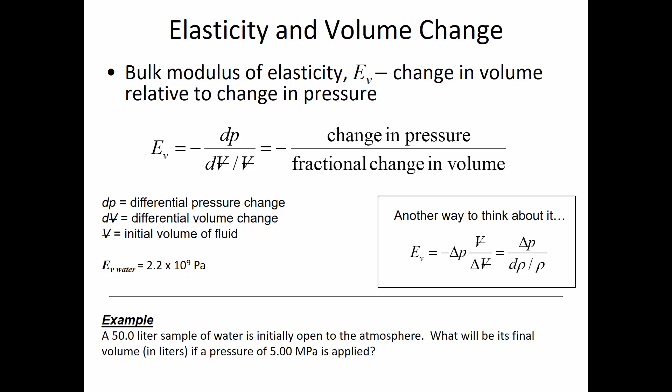I wish we were watching TV. Yeah, kind of. All right, are there other questions? Boy, that's going to be hard, we're really going to have to focus. All right, well, let's do watch TV. It's not going to be as loud as that, though.

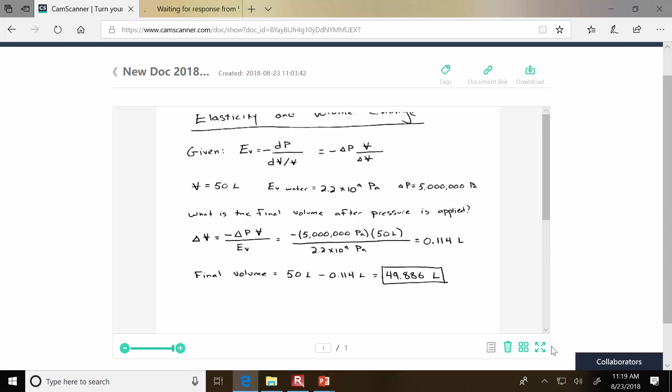So let's watch this video clip. Oh, hold on, this is going to get me kicked off. I gotta do this.

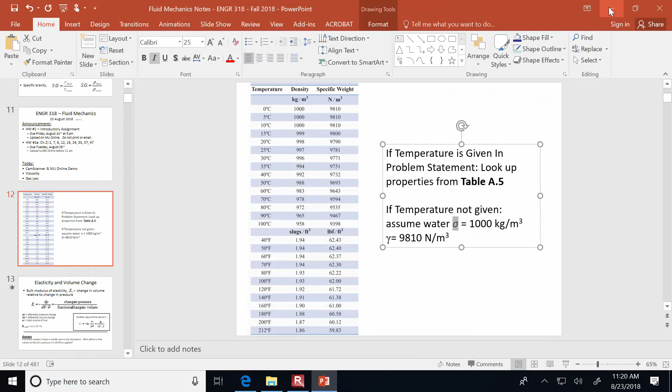The glycerin was deforming very slowly when the container was tipped over.

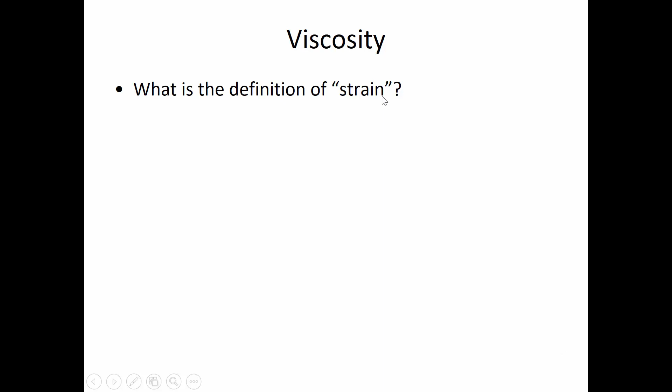So the definition of strain - you've all taken mechanics before, solid mechanics - the definition of strain is the deformation of a physical body under the action of applied forces. So, for instance, if I had a metal ruler - normally I bring a metal ruler to this class, I forgot - if I was pushing a metal ruler on the ends, it would start to bow and deform. And the harder I push, the more it's going to deform.

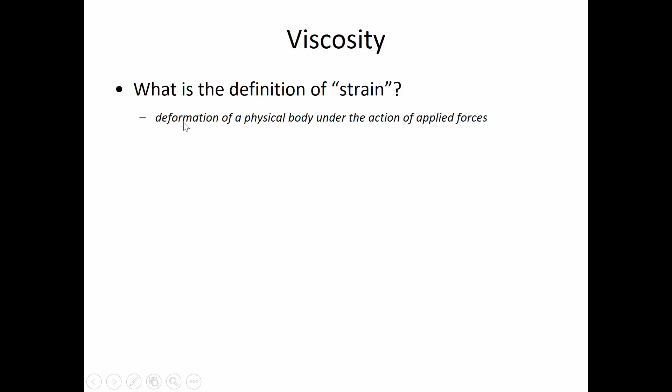So that's an illustration of strain, that deformation under the forces that are applied. So the stress is the force I apply, the strain is the response. In a solid, the proportionality of the stress and the strain we call shear modulus. Hopefully that rings a bell. And one of the ways we differentiate between solids and liquids is that in the case of a solid, it stops deforming when it reaches an equilibrium between the stress and the strain.

But in a liquid, it's going to continue to deform as long as the stress is applied. Like if I had a tank of water and a propeller that's turning inside of that water, I'm going to be applying a stress, and it's going to keep deforming. It's not going to just deform one time and then stop. As long as I apply a force, it's going to continue to deform.

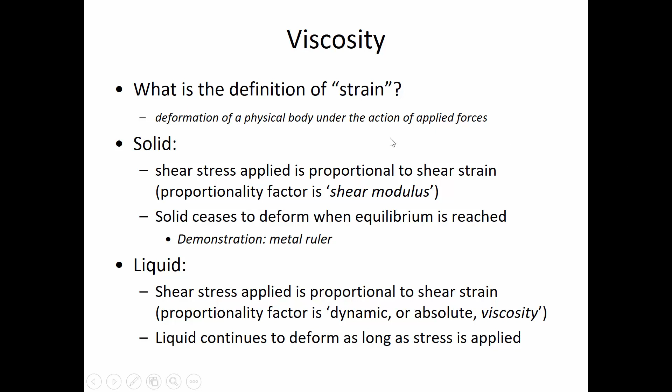Now the proportionality factor in liquids, instead of calling it shear modulus, in fluid mechanics we call that the viscosity. Specifically, sometimes it's called the absolute viscosity or the dynamic viscosity, and those three terms all mean the same thing. Whether a problem statement says dynamic viscosity, absolute viscosity, or just viscosity, it all means the same thing - it's talking about how much a fluid deforms under the application of a certain amount of force. So the stress and the strain: the strain is the response, the stress is the force that's applied.

So here's a river going downhill, and here's the water. The speed of the movement of the water isn't the same at every depth. It would be wrong if we assumed the water was all going the same speed at the top and at the bottom. More realistically, the water very close to the bottom is going slow, and it progressively increases in speed, so there's a velocity profile that looks like this shape. Part of that is because at the bottom of the river there's rocks, or clay, or a smooth concrete surface - regardless of the material, it's applying a resistance force to the water in the opposite direction of the water's movement. And so the shape of that velocity profile is influenced by the viscosity of the fluid.

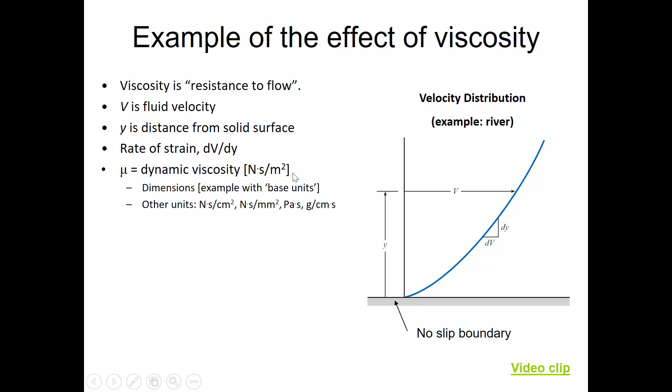Remember that dynamic viscosity, absolute viscosity, or just viscosity by itself, those all mean the same thing, and we're using the variable mu for that. It's Newton seconds per meter squared, the units we're going to use most often. If you go to the back of your book in the appendix, it has those units for viscosity.

And shear stress, the way we can calculate the force that's applied is by normalizing that on a unit area basis. It's the stress that causes strain, which is the deformation. Here is the formula that relates the viscosity of the fluid to the rate of strain and the shear stress applied. This is an important formula, but the next formula is even more important, because it takes this shear stress and we calculate shear force by multiplying by the area that the shear stress is applied over.

Let me show you what I mean. Before we get to that, just think about, in terms of viscosity, it's easier to walk through air than it is to walk through water. But the question is why? If you've ever been in a swimming pool, you know that you can't walk through the water as quickly as you can walk through air. Anyone want to venture a guess why that is?

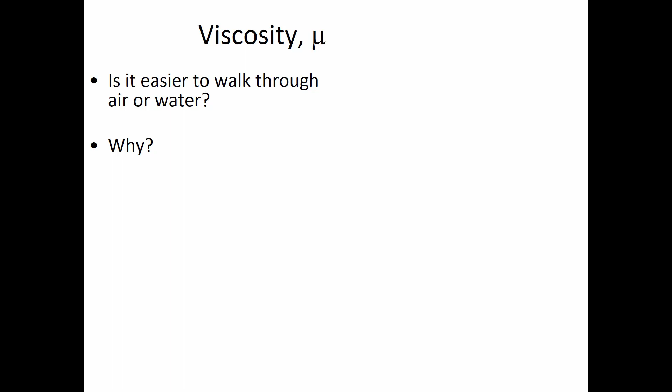The water provides resistance to you. Good, so the water provides resistance. But why does it provide resistance? What's happening? Think about your leg and the fluid. You're displacing the water. Right now I'm displacing the air. As I move through the air, it's getting out of my way, it's deforming. But if I'm walking through water, it also has to move out of the way, but there's more resistance to the force that I'm applying.

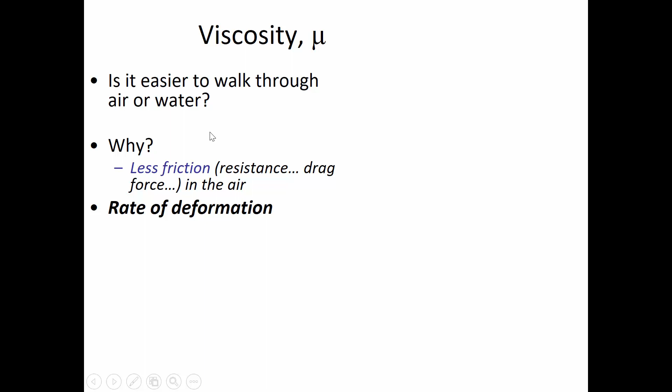So what we can say is there's less friction in air, and the rate of deformation is greater than the rate of deformation for water. Air moves out of your way at a quick rate when you apply a certain shear force, and we don't have unlimited strength to push the water out of the way at the same speed that we normally walk through air. So we could graph that, actually.

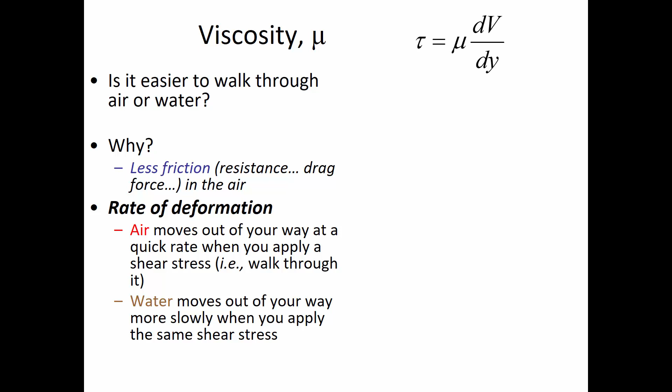We could graph for a certain shear stress that you're applying - think of that as a force. The amount of force applied to the air, there's a lot of deformation for a certain shear stress. There's lots of deformation for air, and very little deformation for water, and even less for oil, for that same amount of shear stress applied.

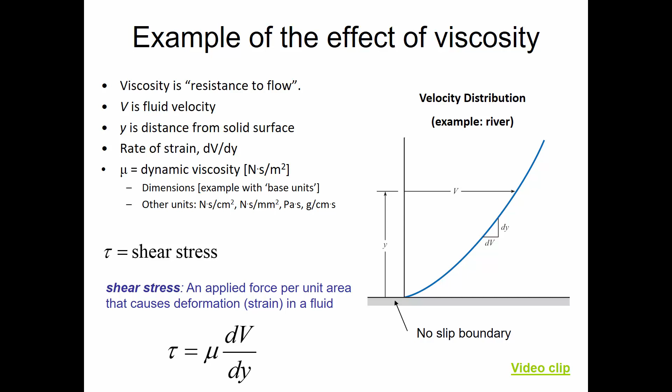And we're going to use this. We're going to say, what is the velocity of the fluid? What is the difference between the distance between two surfaces? And we're going to use it to calculate forces.

Okay, so think of viscosity in two ways. You can think of it graphically, as the slope of a line where you're graphing shear stress versus the rate of strain. Or you can think of it as the proportionality factor that ties the two variables together in this equation.

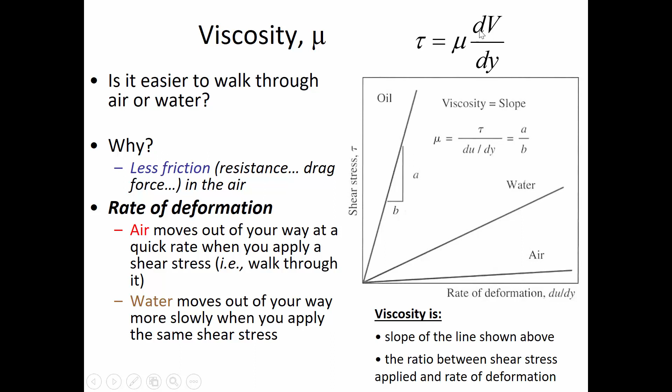So this viscosity relates shear stress and rate of strain. There is one other phrase you need to be aware of. I already told you that absolute viscosity is the same thing as dynamic viscosity, and sometimes we just say viscosity. Those three things are equal.

Kinematic viscosity is different. It's used sometimes because a lot of formulas have both density and viscosity in them. And those formulas that have both of those variables, we might as well combine them into a single factor, especially because sometimes viscosity is related to density. So to simplify that, kinematic viscosity is the absolute viscosity divided by density.

So here's the formula for kinematic viscosity, and you can go to the table in the back of the book and look up the kinematic viscosity for water, air, and other fluids at a variety of temperatures.

And looking at the units, dynamic viscosity is in Newton seconds per meter squared. We already know that kilogram per cubic meter is the unit for density. And since a Newton is a kilogram meter per second squared, if we expand that Newton into its base units, all units are essentially made up of mass, length, and time. Those are the only three base variables that all other units are constructed from.

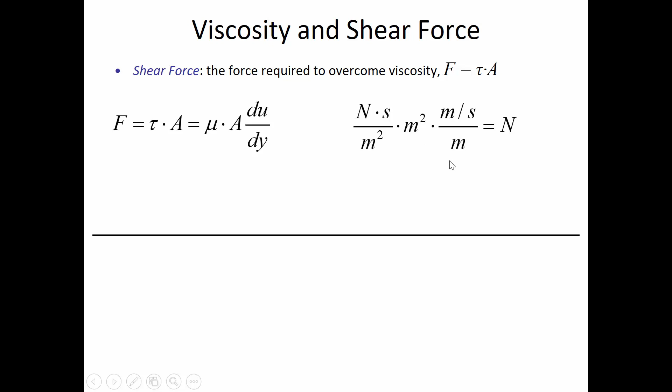If we're a stickler for the units, and we should be, the units of force are newtons, and we get those units by having a shear stress multiplied by an area. du is meters per second because u is a velocity. dy is an incremental distance, so it's in units of meters, and all of that cancels out into units of newtons. This formula is really important for the homework you're going to be solving.

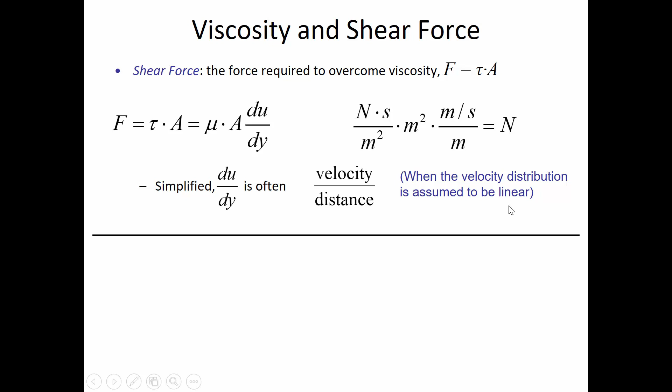So if we take a look at how to apply it, what we often do is just simplify this rate of strain term to be velocity over distance. Let me show you what I mean by that. We can do that when we assume a linear velocity distribution.

Let's say we have a tank full of that liquid from the video, the glycerin. Glycerin was the one where it was shaken and hardly moved at all. When it was inverted, it poured out really slowly. That was the glycerin. So if we had a tank of a viscous fluid and we're going to drag a plate through that tank...

Now when we pull it through the fluid, remember the no-slip condition means the fluid is going to hold on to that solid surface. And so even when we apply a force, it's going to move slowly because the fluid particles have to deform in order for this to move.

So we know the area of the plate, we know the viscosity of the glycerin it's being towed through, and we know the velocity we hope to achieve, 0.58 meters per second.

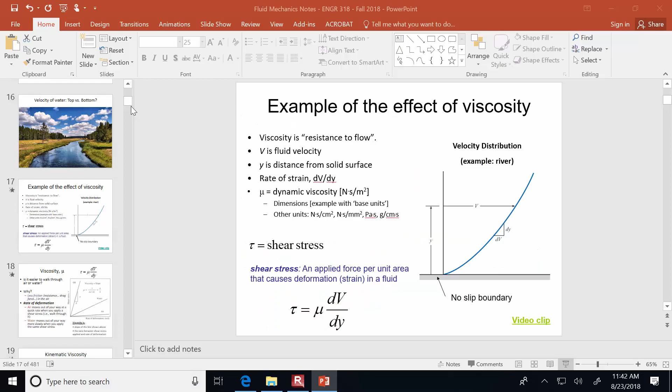This is more like a conceptual thing, but could that force be applied anywhere on the top of the tank? We're not applying it onto the tank. It's the force required to get the plate to move.

So what we're calculating is, we're pulling this way on the plate, but then what the fluid is doing is pushing this way to resist that movement. And so it's really about the fluid deforming, and that's where the force comes from.

The place we're applying the force is, we assume there's maybe like a string of some sort on the leading edge of that plate as it's being pulled through the fluid.

The forces on the top of the plate are higher because the distance between the plate and the next surface is less.

On your homework, you're going to be solving problems similar to this using this formula where you've got a cylinder. Let's talk about the key ideas of one of these homework problems. This is problem 37, and if we go back to the announcement slide, it's the second to last problem on this set that's due Tuesday.

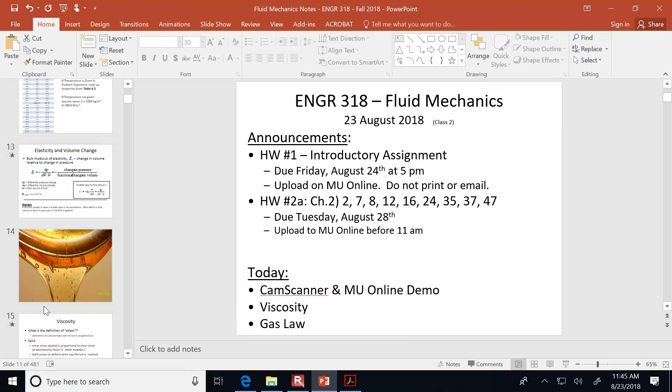Problem 37 is a problem that's related to viscosity and distances and falling surfaces, and the problem statement says derive a formula for a steady rate of descent.

I wanted to translate that for you first of all. You don't really need to derive something. I mean, this isn't calculus class. We're not going to be doing proofs and derivations and so on. What it's really asking is find the velocity when this is falling in equilibrium.

So basically what's happening is we have this pipe, which is kind of like a hollow shell, and a solid cylinder is falling downward through that hollow shell. And what we know is the weight of the cylinder, which is given as 15 newtons.

We know the outside diameter: the pipe has a diameter of 100.5 millimeters, and the diameter of the cylinder is 100 millimeters. If we do a cross-sectional view, here's the pipe, and here's the cylinder, and we assume it's falling centered in there. So if we draw the dimensions, it's 100 millimeters here, and 100.5 millimeters is this distance.

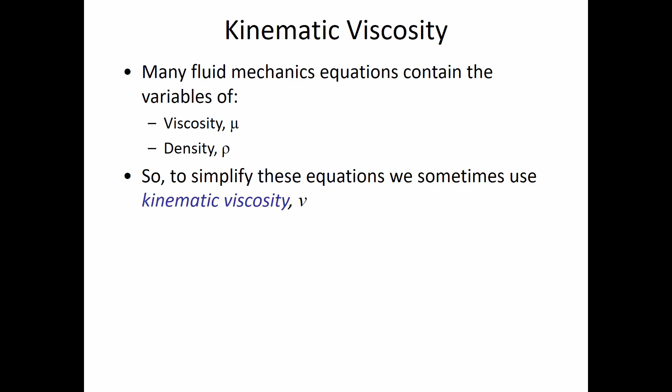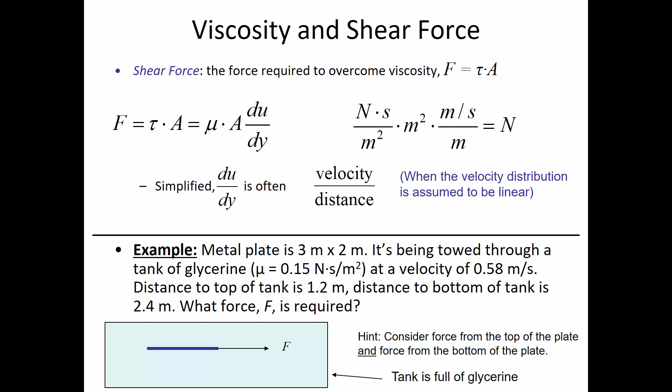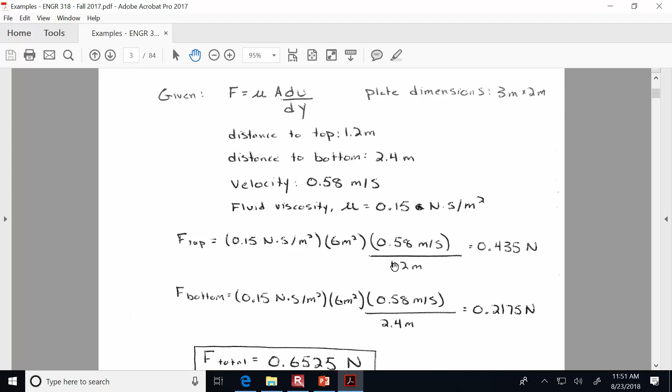And so back to this other example, remember that the smaller the distance, the greater the force. And the top force was, well, let's see, where is it? If I go back to my numbers on that. In this one, the top force was 0.435, the bottom force was 0.21, and that was a gap of 1.2 meters and 2.4 meters. The reason why we're not going to account for the top and the bottom area of this cylinder is that it's this tiny little gap area that's kind of the critical distance that causes the vast majority of the forces. And by the way, we're going to substitute that in as a dy.

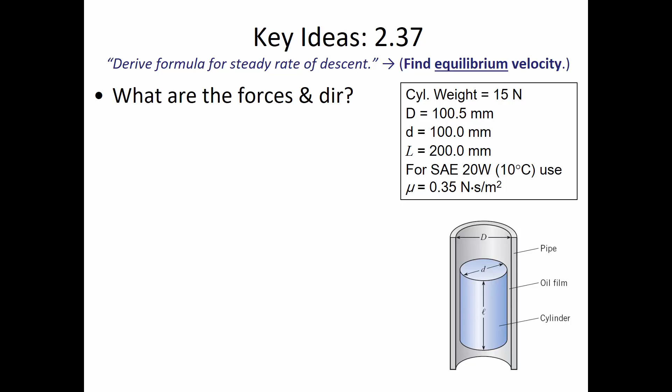And here's our formula that we're going to be using, dy. What's the distance? What's the gap distance? 0.25 on both sides. Okay, so our first reflex is to say, oh, it's 0.5, right? But why is it not 0.5? Why is it 0.25? Because there's opening on both sides.

It's because on either side, this half a millimeter of clearance, it's split equally on the left and on the right. So this cylinder is falling down the center line of the pipe. So the dy distance that you're going to be using for this problem is 0.25 millimeters. And you'll need to convert it to meters for everything else to work out, since your viscosity and your area also are going to need to be calculated in meters.

Okay, so we've talked about the critical area, and we've talked about the gap distance. The last thing that we need to talk about is that this is a force balance. So equilibrium says that the force down and the force up are equal. So force down is what? Equals force up. Force up. So how do we calculate what or know what the force down is? Gravity. It's due to gravity.

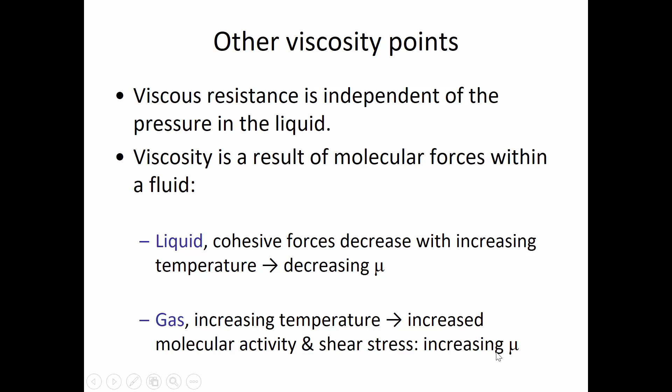So you know that the oil pan empties a lot more quickly if you warm up the engine first. Because the reason you do that is by warming up the engine and warming up the oil, the viscosity decreases when it's warmer, and then it flows more quickly out of the engine. So in the case of a gas, what that means is that if you have warmer gas, because the molecules are bumping into each other, they have a lot more collisions, and the velocity of those collisions is higher. The gases are kind of getting in the way slightly more, and so the viscosity and viscous resistance is greater as the temperature goes up.

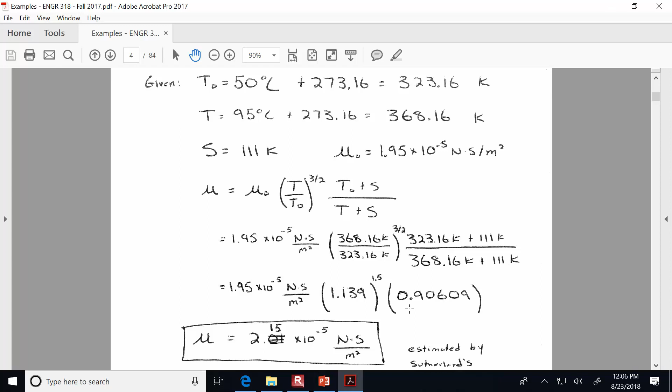Sutherland's equation is used because gas viscosity varies as a function of temperature. Let's look at that temperature variation. What we already know is that oil becomes less viscous as it heats up. What I told you a moment ago was that air becomes more viscous as it heats up. The trend is fairly flat, it doesn't become hugely more viscous, but it does become a little bit more viscous. So that's kind of an interesting point of fact that the viscosity increases.

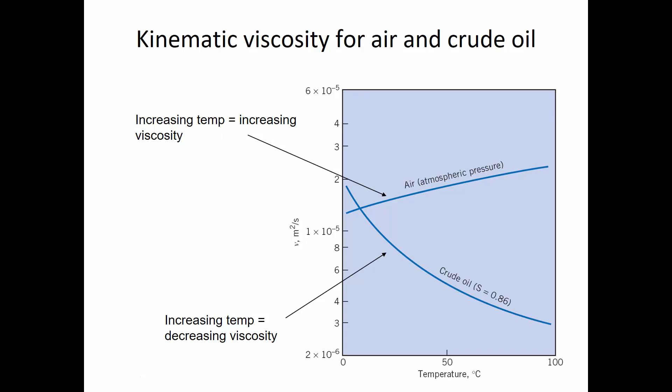When we're talking about fluid properties, one of the things we have to be aware of is the difference between Newtonian and non-Newtonian fluids, and this ties into viscosity. Let's start by looking at a video clip that illustrates a non-Newtonian fluid.

A non-Newtonian fluid is something where the viscosity actually responds to the shear force being applied. So the kid who's walking quickly, as he's jumping up and down on the fluid, the viscosity immediately under his feet is very high because a big shear force is being applied. But the kid who wasn't moving very quickly was applying a low shear force, so the fluid's viscosity was lower, letting his foot sink down because it was deforming easily. Let's look at this graphically.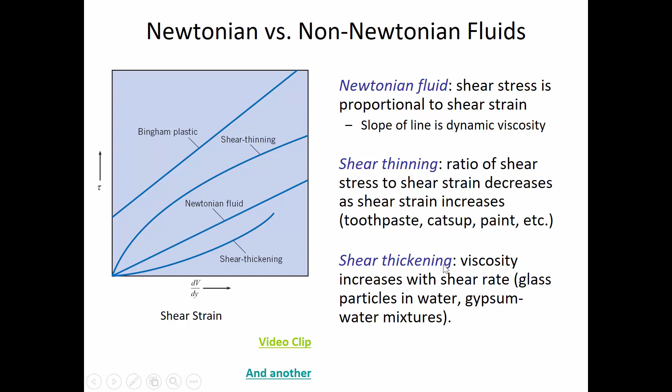There are also shear thinning fluids, like toothpaste or ketchup. In a shear thinning fluid, it starts out with a lot of viscosity, but the more shear stress you apply, it becomes less viscous. That's partly why with a glass bottle of ketchup, you have to really hit the back of the bottle - you're actually decreasing the viscosity of the fluid temporarily so it can flow, and then it stops when there's no more shear force. You apply another bang to the back, and the viscosity temporarily decreases again. So the fluid, in essence, is responding to the force that's applied.

Let's look at this other clip.

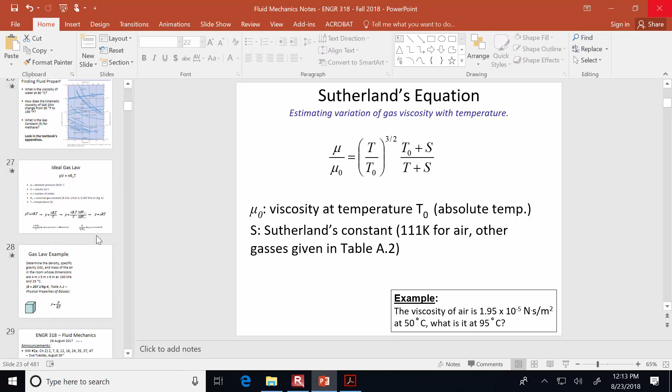So the example I want to show you, I'll put this solution on the screen, and if it would help you to work through it on your own time, you'll be able to do that by going back to the video recording. We were going to determine the density, specific gravity, and mass of air in a room that's 4 by 5 by 6 in size. So we've got a certain volume of air, and we want to know the density, specific gravity, and mass.

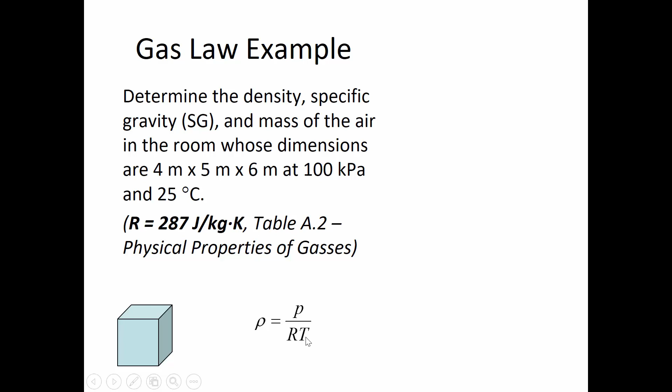The key to this is calculating the density first. The density relates to the pressure, and in this room the pressure is 100 kilopascals, so you put in 100 kilopascals. The R value comes from table A2, and the T is the temperature of the gas, which you've converted from Celsius to Kelvin.

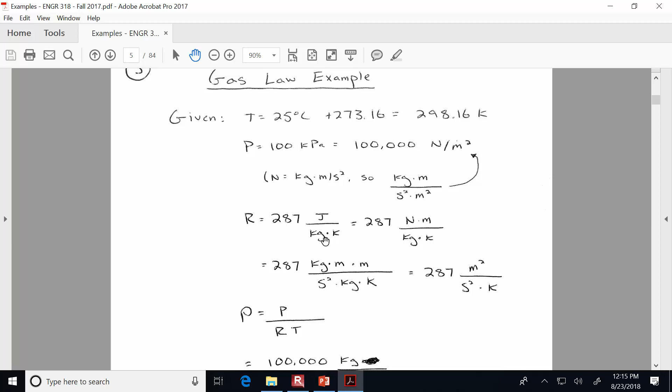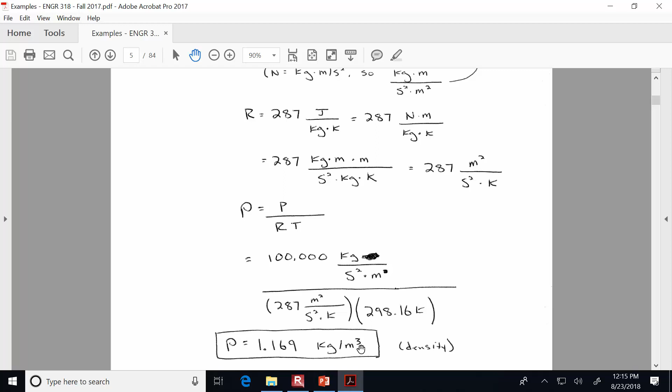Let me put on the screen how you'd calculate this, given all this information - first you convert from Celsius to Kelvin. Here's the R value, and just for fun, I'll show you the units if you break that down from joules per kilogram Kelvin into its base units. So you can calculate the density of the gas using that formula. Then, once you know the density, remember specific gravity is just the density of something relative to water - so here's the specific gravity. You could also calculate the mass of air in the room by multiplying by the room's volume.